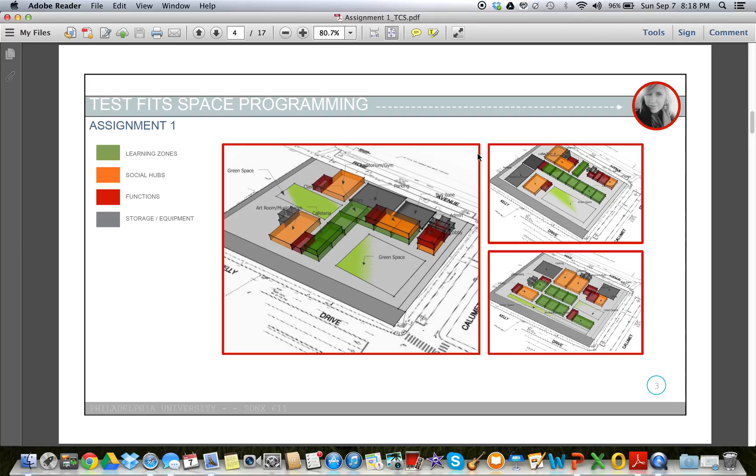Okay, so moving forward from the test fits we did in the previous part of Assignment 1, this is the space program created for the Meek-1 school. The zones we created include the green spaces, which are learning zones, the orange spaces, which are social hubs, the red spaces, which are functions, and the gray, which are storage and equipment. So this is just a preview of the test fits from the assignment before.

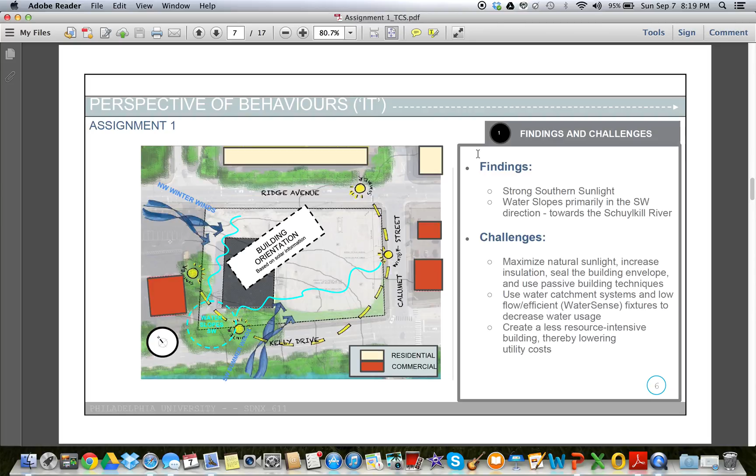Moving forward into the integral theory of the four quadrants, for perspectives of behaviors, which is to shape form to maximize performance. When looking at this site, you can see that there's strong southern sunlight and water slopes primarily in the southwest direction towards the Schuylkill River.

So with this in mind, the integrated design scheme that I proposed is positioning the building on an angle on site to allow the strong southern sunlight to penetrate into the building. Even more so, the learning zones should be located in the south direction to benefit from that sunlight, as well as I proposed including a horizontal window curtain wall to adorn the facade.

And as water slopes in the southwest direction, the building should be oriented away from the slope and a water catchment system should be placed onto site. As you can see, this building type is a deep plan and it's single story.

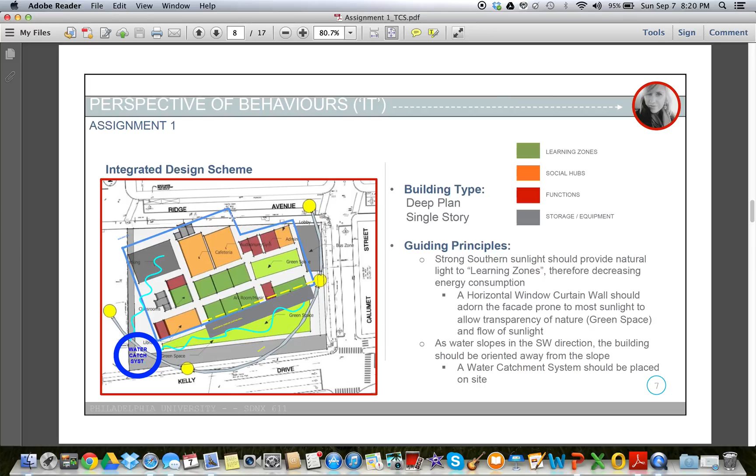Moving on to the perspective of systems, which is to shape the form to guide flow. When looking at the site, you can see that there's heavy vehicular traffic and pedestrian traffic on the intersection of Kelly Drive and Calumet Street, as well as there's this 100-year flood line which runs through the site.

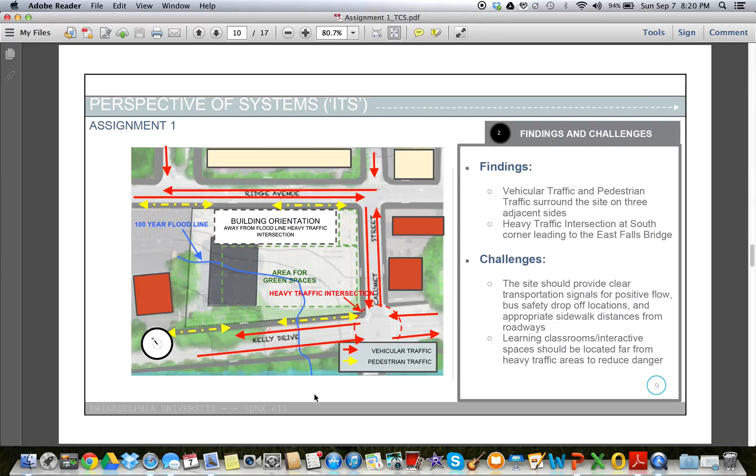So the integrated design scheme that I proposed is, because of this heavy traffic intersection, we should set the learning zones and primary social hubs back from the heavy traffic patterns for safety. Moreover, this green space will then act as a void between the learning zones and the traffic intersection. And moreover, we should probably provide a safety barrier near the traffic patterns.

For the flood line that we have here, the primary building should be located above that line. I do have this system as a linear plan, as we have this linear stretch on the site, as well as a single story. To break up the space, though, I proposed that the auditorium and gym be a separate building that could utilize some outside functional space.

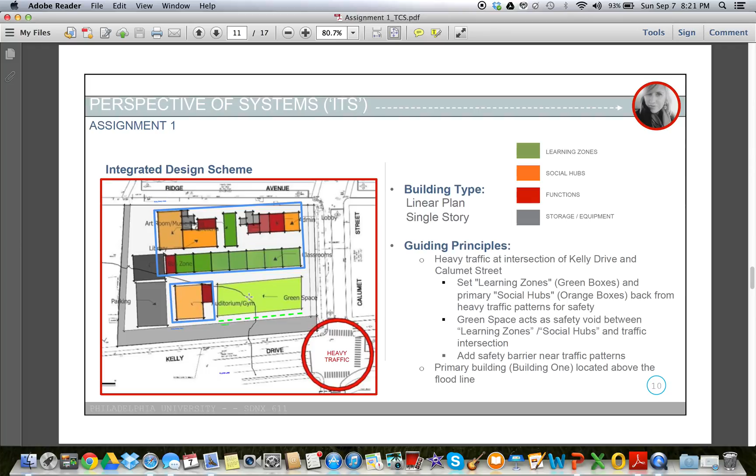Moving into perspective of cultures, which is shape, form to manifest meaning. The findings and challenges here are that the site has the potential to provide a community gateway as well as a connection into the neighborhood. There's a rich culture of East Falls that the Meek-1 school and the site can definitely contribute to.

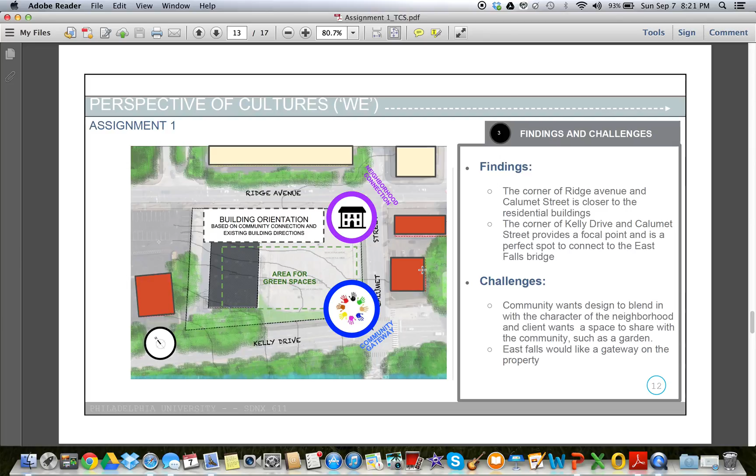So for this integrated design scheme, I proposed that since we have this East Falls Bridge at the intersection of Kelly Drive and Calumet Street, that artwork should probably be displayed at this position on the site. This could be an interactive link to the community, something that the community can come to and see, and something that the kids can as well contribute to.

I also proposed that the lobby should be a connection into the neighborhood. As closer residences are near Ridge Avenue, this would be more of a neighborhood connection. So the lobby should definitely be open and something that's multi-story, something that looks inviting and will intrigue the neighborhood to appreciate and come see the school.

So for this plan, you can see I have again proposed two separate buildings with the auditorium and gym as its separate entity. But as well as this is a courtyard type of building, as we will have two green spaces that can either contribute to vegetation or just green interactive space.

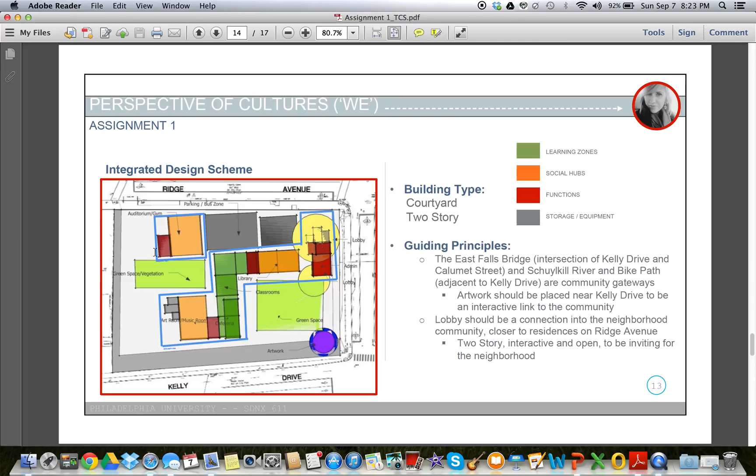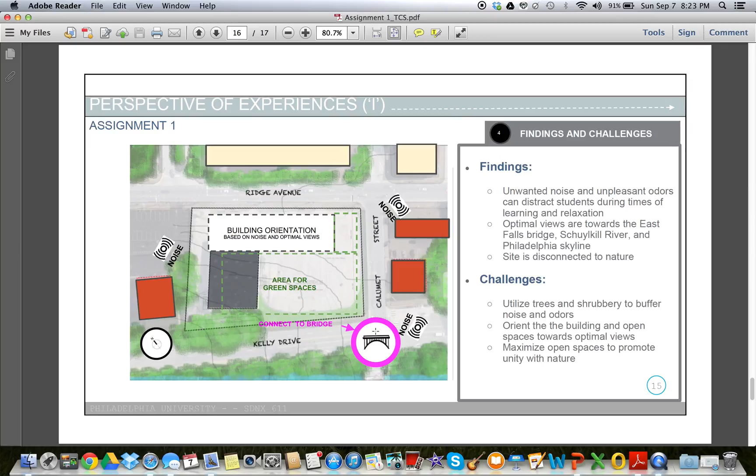Moving on to perspective of experiences, which is to shape the form to engender experience. For the findings and challenges here, noise surrounds the site on basically all sides. And optimal views are to the East Falls Bridge. So the site is somewhat disconnected from nature.

So for this integrated design scheme, I'm proposing that we include a lot of shrubbery to not only prevent the noise and unwanted sights on site, but it will also create more of an interaction with the environment to bring some more of that green environment onto the site. So the shrubs will essentially provide a link to environmental awareness.